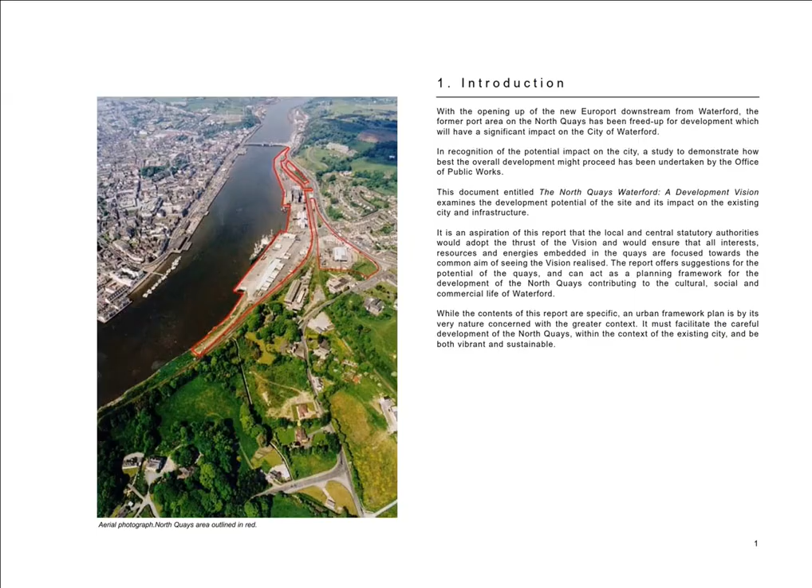Part 2, Executive Summary. The quays along the north side of the river Suir in Waterford will be underused and in time an eyesore, from the waterfront on the South Quay. However, it provides a unique opportunity for development, creating a dynamic transformation of the area, which will contribute to the re-emergence of Waterford as an important and active centre, both in an Irish and European context. This site directly faces the South Quays, and any development would therefore not only be clearly visible for its entire length, but it would also afford the best views of the historic city centre.

Development of the North Quays will have a dual role, of creating its own coherent image and identity, and also integrating with the rest of the city. Examination of the site indicates that there is scope to utilize imaginative measures to overcome the limitations, and to add to the attractiveness and quality of life proposed for that quarter. This site is, for many visitors to Waterford, the first interface with the city. It is also part of an immediate landscape of dramatic scale prompted by the cliff face and steep hill. Studies of the landscape, built and natural, the setting, scale of existing development, and the recent history and uses of the quays, confirm the potential for suitable mixed development.

The elements that comprise the character of the site make up an integrated landscape of different scale and quality to that evident on the South City. It is this quality, in conjunction with the strategic location of the site, both locally and regionally, that can provide the dynamic for this part of the city, to evolve economically and socially. The strategy proposed in this report takes the above strengths of the North Quays as its starting point, as well as addressing other parallel issues.

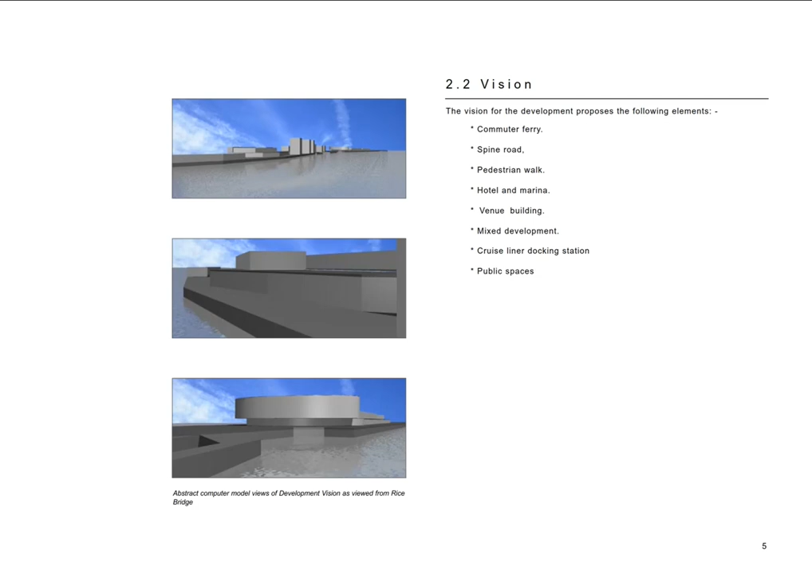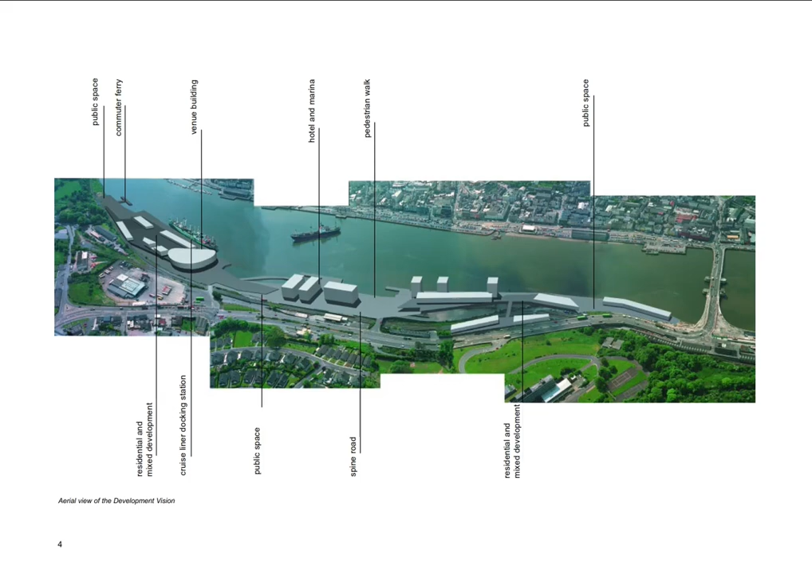2.2 Vision. The vision for the development proposes the following elements: Commuter ferry. Spine road. Pedestrian walk. Hotel and marina. Venue building. Mixed development. Cruise liner docking station. Public spaces. Part 3, the North Quays in context.

3.1 Physical analysis. 3.2 Transport infrastructure. 3.3 History. 3.4 Strengths and advantages.

3.1 Physical analysis. This report examines the section of the quays that stretches along the north edge of the river Suir, between Rice Bridge and Abbey Church.

Its southern boundary is the river, while to the north, it is contained by the railway line. Along the 1.5 miles of its length, the land varies between 40 and 80 meters in width. It is an assembly of a variety of independent man-made wharves. The ground is flat at just under 3 meters above sea level, at Ordnance Datum Malin Head.

The natural landscape behind the quays rises sharply to the east. The dock road and railway line run side by side between the quays and high ground, until the railway slips under the road as it meets the bridge.

The quays are mostly open empty space, in which lifting cranes, temporary storage sheds, large mill buildings and silos sit, as reminders of Waterford's industrial and maritime history.

The development of a Europort, 4 miles downstream, is gradually relocating the port activity.

With the exception of the railway station, Jury's Hotel, schools, a church and the low-rise residential community of Ferrybank, most of the city of Waterford is located on the south of the river.

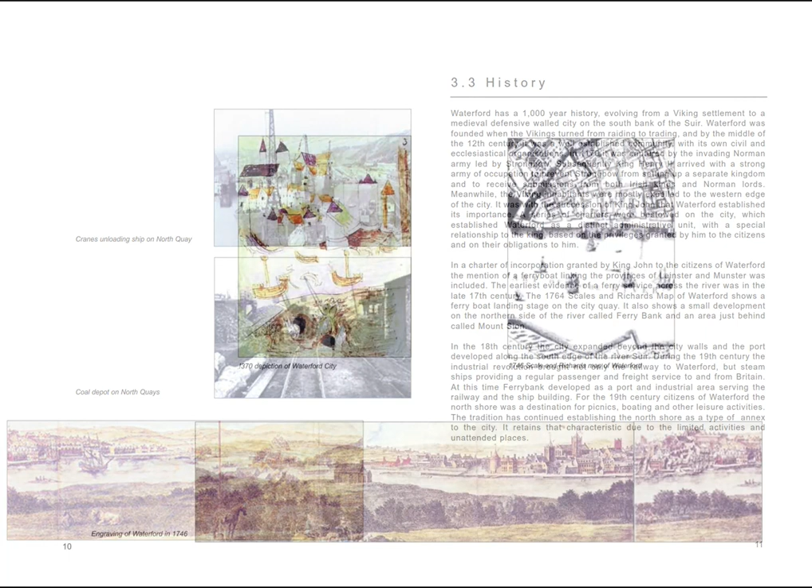It was with the succession of King John that Waterford established its importance. A series of charters were bestowed on the city, which established Waterford as a distinct administrative unit, with a special relationship to the king, based on the privileges granted by him to the citizens and on their obligations to him.

In a charter of incorporation granted by King John to the citizens of Waterford, the mention of a ferryboat linking the provinces of Leinster and Munster was included. The earliest evidence of a ferry service across the river was in the late 17th century. The 1764 Scales and Richards map of Waterford shows a ferryboat landing stage on the city quay.

It also shows a small development on the northern side of the river called Ferrybank, and an area just behind called Mount Sion. In the 18th century the city expanded beyond the city walls, and the port developed along the south edge of the river Suir.

During the 19th century the Industrial Revolution brought not only the railway to Waterford, but steamships providing a regular passenger and freight service to and from Britain. At this time Ferrybank developed as a port and industrial area serving the railway and shipbuilding.

For the citizens of Waterford in the 19th century, the North Shore was a destination for picnics, boating and other leisure activities. The tradition has continued, establishing the North Shore as a type of annex to the city, and it retains that characteristic mainly due to limited activities and untended areas there.

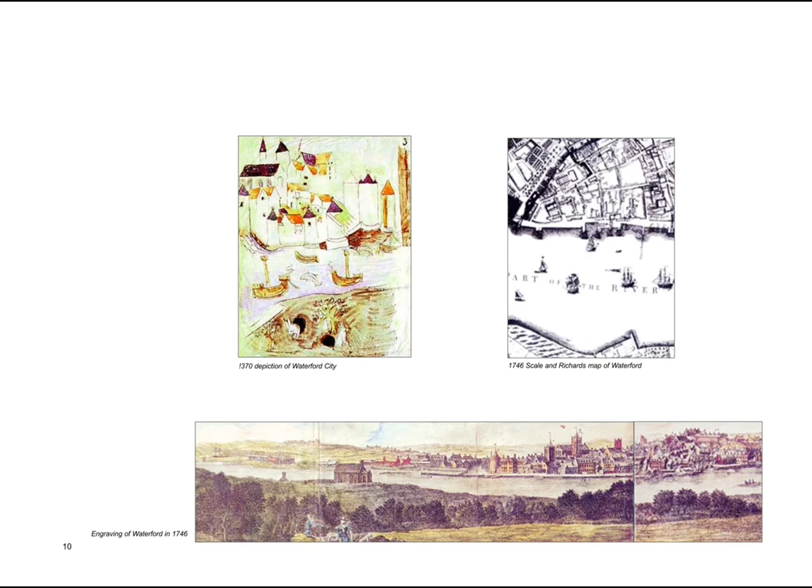Section 3.4 Strengths and advantages. One: it is a contained site with the river to the south, railway and hill behind. Two: south orientation. Three: unobstructed views downstream and across the river to the South Quay. Four: immediate access to the site from the road network.

Five: proximity of railway station. Six: existing buildings capable of adapting to new use. Seven: 155 acres, 62.7 hectares, of vacant site to receive new development. Eight: new transport link with the South Quays possible.

Nine: scale of the site is large enough to be compatible with that of passenger cruise liners docking in Waterford. Ten: the site offers a variety of potential functions as part of the development. Eleven: existing access points occur at strategic locations.

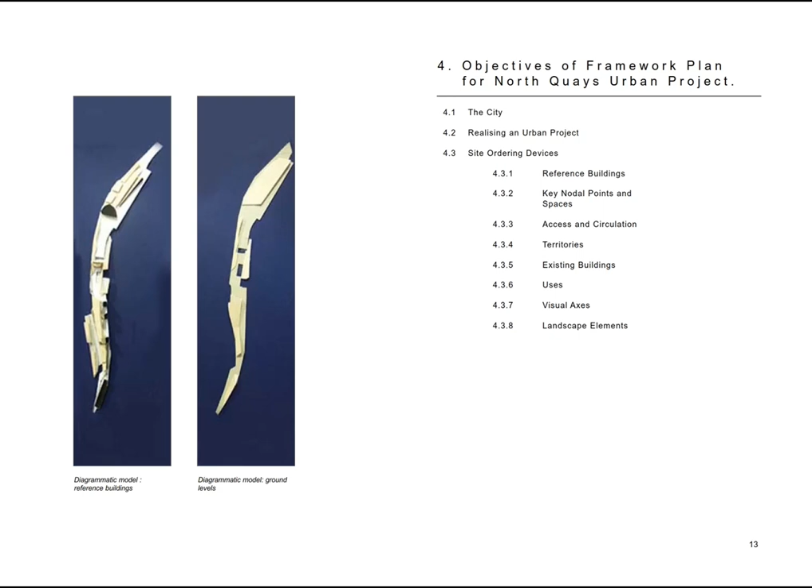Part 4: Objectives of Framework Plan for the North Quays Urban Project. 4.1 The city itself. 4.2 Realizing an urban project. 4.3 Site ordering devices, including: 4.3.1 reference buildings, 4.3.2 key nodal points and spaces, 4.3.3 access and circulation, 4.3.4 territories, 4.3.5 existing buildings, 4.3.6 uses, 4.3.7 visual axes, and 4.3.8 landscape elements.

4.1 The city. Redeveloping the North Quays will make a substantial impact on Waterford City, economically, physically and socially. The immediate proximity of the quays to the centre of the city, its long river frontage and accessibility to road networks, determine the strength of its location.

The disadvantage of poor access between the site and the city centre across the river will have to be addressed in any eventual development. Rotterdam and Bilbao, although on much larger scales, have addressed similar sites in their cities in the last 10 years, on ground that is geographically and administratively located in the centre of the city, but yet economically and physically isolated. In Rotterdam, through the use of a new bridge, the Kop van Zuid, a once removed part of the city is now attached to its centre, and has extended the centre along a new strategic axis.

The general approval that the Kop van Zuid has enjoyed from the beginning has been due mainly to the fact that this project represented the City Council's aspiration to give the city a new international allure, and the desire to guarantee that any new urban development scheme should also benefit the existing city and its inhabitants. A social return is ensured through the exercising of proper control on the material impact of new urban design projects on the existing city.

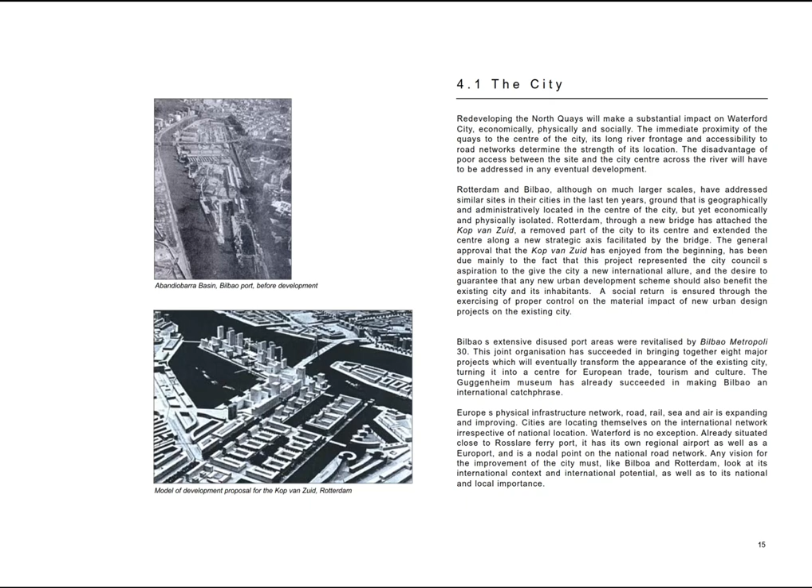Bilbao's extensive disused port areas were revitalized by Bilbao Metropoli 30. This joint organization has succeeded in bringing together 8 major projects, which will eventually transform the appearance of the existing city, turning it into a center for European trade, tourism and culture. The Guggenheim Museum has already succeeded in making Bilbao an international catchphrase.

Europe's physical infrastructure network, road, rail, sea and air, is expanding and improving. Cities are locating themselves on the international network irrespective of national location. Waterford is no exception. Already situated close to Rosslare Ferry Port, it has its own regional airport as well as a Europort, and is a nodal point on the national road network. Any vision for the improvement of the city must, like Bilbao and Rotterdam, look at its international context and international potential, as well as to its national and local importance.

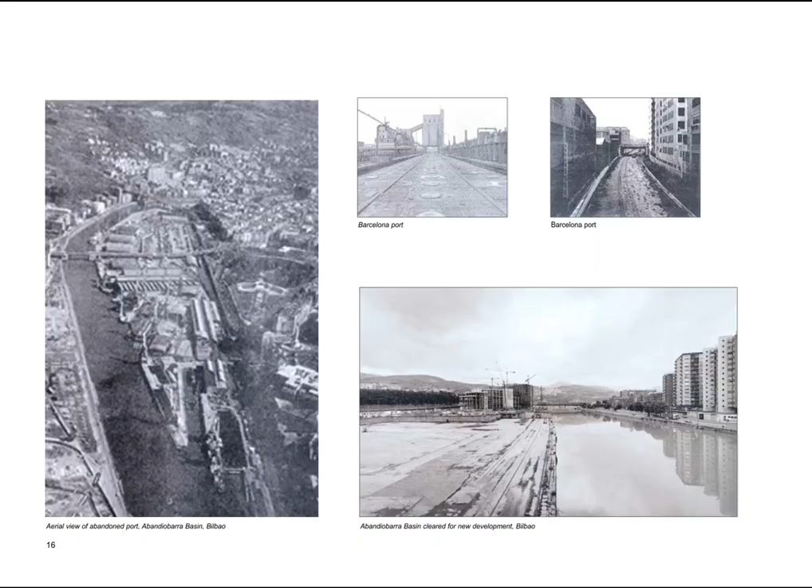4.2 Realizing an urban project. Urban projects, like the vision for the North Quays, currently hold center stage position in discussions on the state of the emerging city of Waterford. Projects concerning vast tracts of ground have become the focus of attention in other cities, where infrastructure expansion and advancement has made almost obsolete the existing city's structural framework.

These urban projects, primarily through their proximity to transport networks, hold the capacity to become new centralities, different to the traditional city centre. In January 1998, the Europan Federation held a forum to compose the charters for its fifth competition. Europan is the European Federation for Architectural Competitions. It aims to generate more in-depth knowledge of, and reflection on, housing issues and urban planning, and to promote exchange on this subject among the different countries of Europe.

For large urban projects, Europan is of the view that no plans are formally approved, rather there are ideas, which, if they have sufficient force, enable the smaller project to be realized within the general ideas. This ensures private investment is guided towards a compatibility with public investment, in that the ideas proposed by the design team reflect what is beneficial to the city and its inhabitants, and are also economically attractive for private investors.

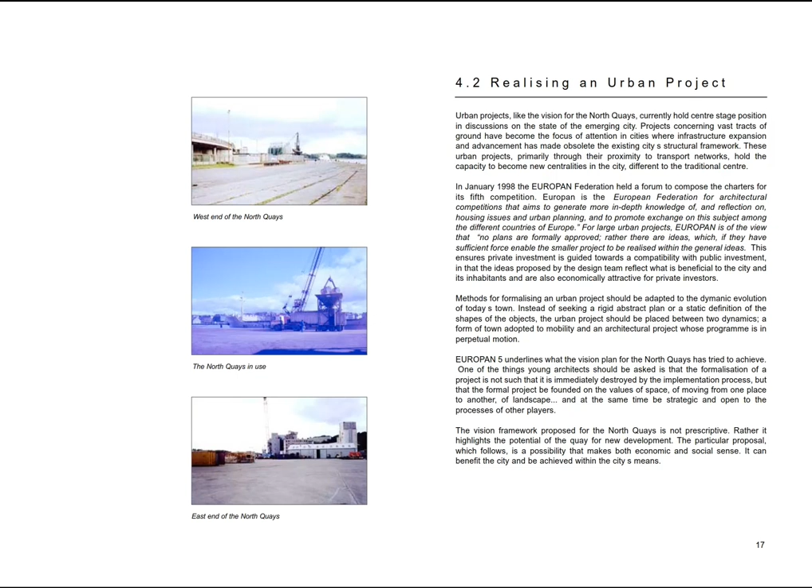The vision framework proposed for the North Quays is not prescriptive. Rather it highlights the potential of the quay for new development. The particular proposal, which follows, is a possibility that makes both economic and social sense. It can benefit the city, and be achieved within the city's means.

4.3 Site Ordering Devices. Appropriate architectural ordering devices must be established for any proposed development form. These site ordering devices will emerge from both the existing atmosphere of the site and the physical form of the ground. They must be considered, and in some cases must dictate the design process.

The North Quays site is a long and narrow strip of ground taking the shape of a slender, elongated S. There is no singular connecting line of vision through the site, rather a number of smaller axes prevail, as a result of the site form. This internal dynamic creates a collection of zones or territories of various spatial proportions and orientations. In moving from one end of the site to the other, one experiences the various qualities of each of the territories. The properties of each differing zone will feature in the design of the overall site layout mainly due to the extensive size and unique shape of the site.

A controlled layout cannot be exercised in one volume. Waterford City, in 1998, is not unlike other cities elsewhere in Europe with its declining port activity. Bilbao, as previously mentioned, bears particular resemblance in areas of its abandoned port along the River Nervion, which has recently been regenerated in the face of declining port activity.

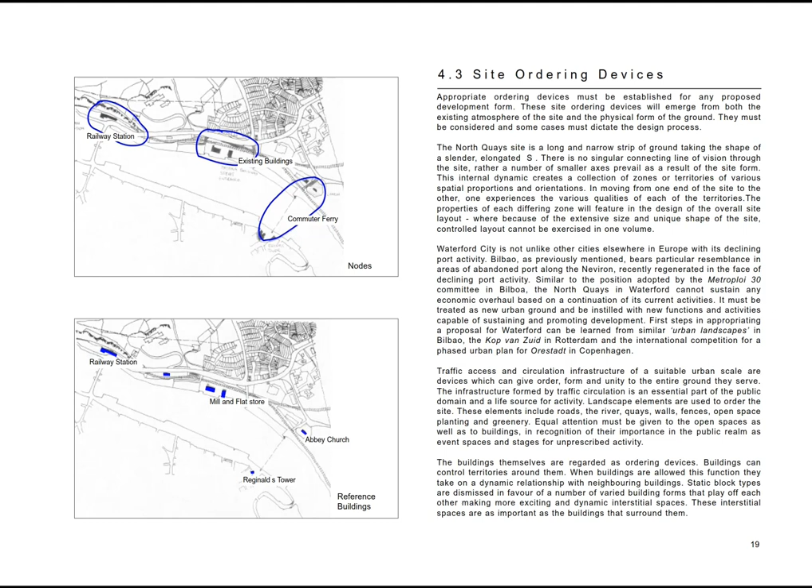Similar to the position adopted by the Metropoli 30 Committee in Bilbao, the North Quays in Waterford cannot sustain any economic overhaul based on just continuation of its current activities. It must be treated as new urban ground and instilled with new functions and activities capable of sustaining and promoting development. First steps in appropriating a proposal for Waterford can be learned from similar urban landscapes in Bilbao, the Kop van Zuid in Rotterdam, and the international competition for a phased urban plan for Ørestad in Copenhagen.

Traffic access and circulation infrastructure of a suitable urban scale are devices which can give order, form and unity to the entire ground they serve. The infrastructure formed by traffic circulation is an essential part of the public domain and a life source for activity.

Landscape elements can be used successfully to order the site. These elements include roads, the river, quays, walls, fences, public open space, planting and greenery. Equal attention must be given to the open spaces as well as to buildings, in recognition of their importance in the public realm as event spaces and stages for unprescribed activity.

The buildings themselves are obviously regarded as ordering devices. Buildings can control territories around them. When buildings are allowed this function, they take on a dynamic relationship with neighboring buildings. Static block types are dismissed in favor of a number of varied building forms that play off each other, making more exciting and dynamic interstitial spaces. These interstitial spaces are as important as the buildings that surround them.

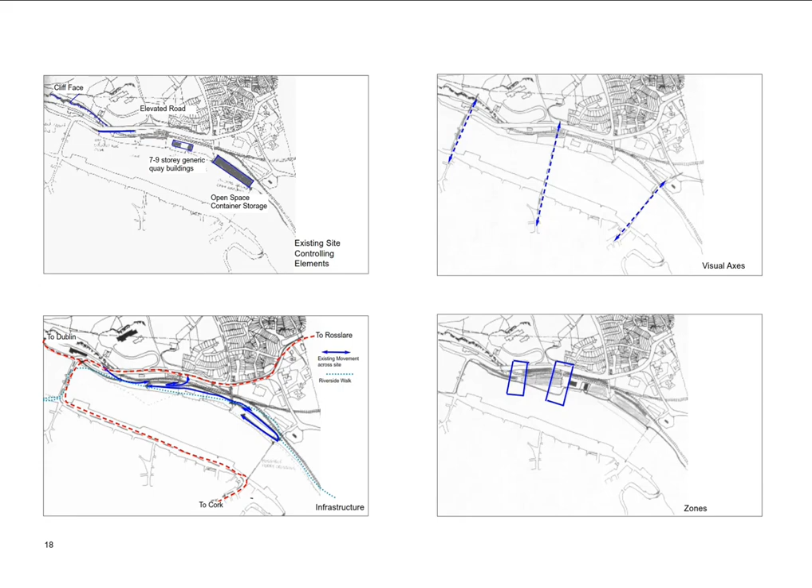4.3.1 Reference buildings. In many urban landscapes, buildings function beyond their immediate use, and serve to act as points of reference, benchmarks and navigational instruments for an area. From without, the North Quays need to be comprehended and referred onto benchmark buildings and spaces. Buildings can achieve this reference status by means of their size, form and grouping.

The long, strip-like plan of the North Quays demands a scattering of such markers along its length. Gaps and open spaces are also necessary as zones of relaxed concentration. Such buildings can offer yet a third function, that of civic use.

Towers proposed for the Abandoibarra area of Bilbao were accepted by the city, only when their top floors became public viewing platforms. To associate such dominant forms only with corporate identity was deemed inappropriate for the city.

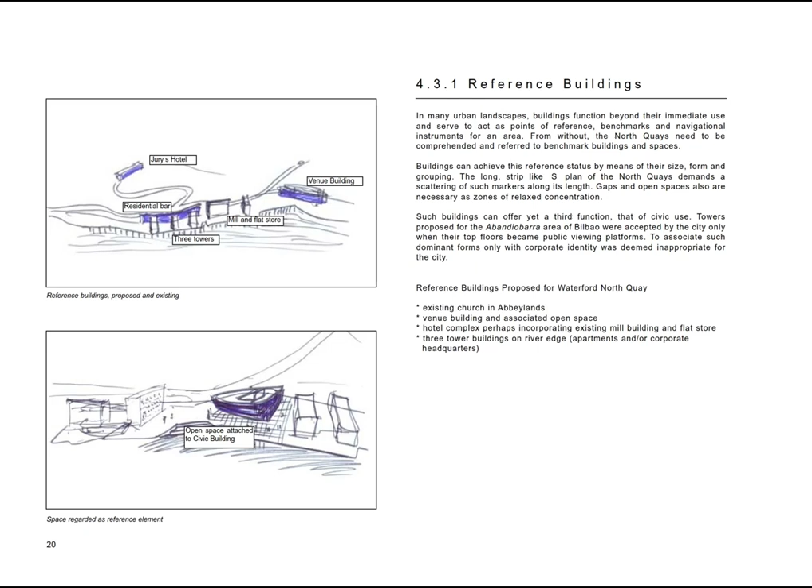Reference buildings proposed for Waterford North Quay: 1. Existing church in Abbeylands. 2. Venue building and associated open space. 3. Hotel complex, perhaps incorporating existing mill building, and flat store. 4. Three tower buildings on river edge, apartments and or corporate headquarters.

4.3.2 Key nodal points and spaces. It is vital for any development project of limited economic activity to be firmly embedded into its urban context. This involves recognizing areas where existing activity can determine the evolution of a part of the new development.

The project group for the Kop van Zuid in Rotterdam named four intersection or concentration points as places to embed the project terrain into the neighborhood where it is situated. Not only does this action benefit the new development, but it can also reinforce and advance social and economic activity in the existing area. Competitors making proposals for the Ørestad region of Copenhagen all proposed zones of concentration, dispersed through the region, that in time would grow into each other.

The railway station, and the ferrybank residential community surrounding St. Mary's Church, lie at opposite ends of the North Quays. Both of these areas can be reinforced, through the allocation of new compatible activities, to these zones of the quay.

Other zones of concentration can be made with new activity. For instance, an anchor project, or an open space, or existing buildings have the physical and functional status to attract other activity. Zones of concentration can coincide with reference buildings and spaces.

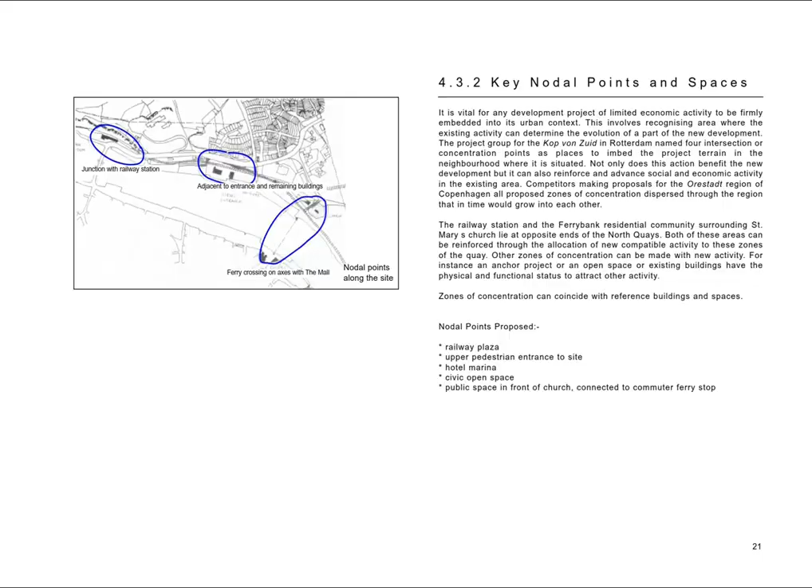4.3.3 Access and circulation. As it stands, there are 2 entrances to the North Quays site, across the railway line at the CIE depot and over the railway bridge on the slip road behind the silos. In making the proposal for the North Quays, other locations were considered as a primary entrance, but were subsequently put aside in favor of the more practical solution.

These entrance points feed traffic onto a spine road, which runs parallel to the railway line. This road is not a through road, and only serves the quays. Both ends terminate under new raised platforms, where service accesses and parking are located. Attached to this road are secondary roads which connect into the depth of the site.

A commuter ferry links the North and South Quays at their east ends. This will connect the North Quays with the commercial centre of Waterford City and will reinstate an old ferry crossing that brought people from Reginald's Tower to Abbey Church for recreational pursuits in the past.

A pedestrian route runs through the site, and along its length this route is enhanced by pedestrian access to the site and by a series of semi-private and public spaces. Unlike the traffic spine, this movement along the site is not strictly controlled and a variety of circulation ways to destinations are available.

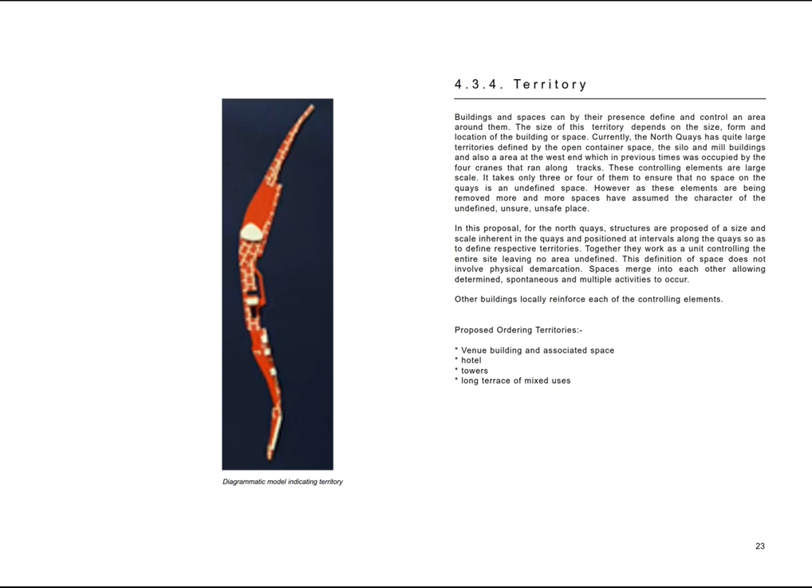4.3.5 Existing buildings. Although many abandoned elements of the North Quays are being removed, it is important not to assume that future development needs cleared, empty ground. Rather than create a new urban area with a new internal scale, or mimic the scale and arrangement of the South Quays, new development can stem from the scale and arrangement already inherent on the site.

This scale is large in comparison to the prevailing domestic scale of the South Quay facades, but is in harmony with its contextual landscape. The dominating landscape never allows the quay itself to be viewed in isolation. Instead, it is seen as part of a greater picture composed of a high steep hill, a large slab hotel building, wide primary roads, a cliff face and long railway station building.

Any future development will be read against this same landscape and must therefore be of an appropriate scale, in order to become part of the composition. Existing buildings, when appropriate for reuse, are an organic cell that can stimulate new development proposals.

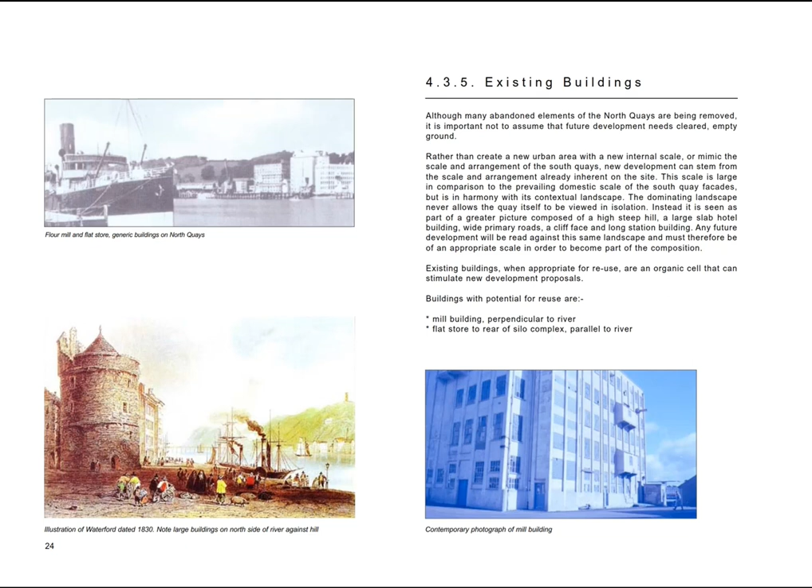Buildings with potential for reuse are: 1. Mill building, perpendicular to river. 2. Flat store to rear of silo complex, parallel to river.

4.3.6 Uses. Currently, a mixture of uses combined with less density of consolidated urban fabric, green areas, and an overall diversity, are the concepts internationally pursued for contemporary urban areas. Public buildings and activities are sited among commercial and residential areas, in order to achieve a level of activity sufficient to sustain areas of common multipurpose use.

New, semi-independent centers need much economic activity to sustain them, as is evident in the Port 2000 Center in Barcelona. In an area that is not being rebuilt for an existing use, and an area with no existing community, it is vital that the mixed-use arrangement extends to the individual building.

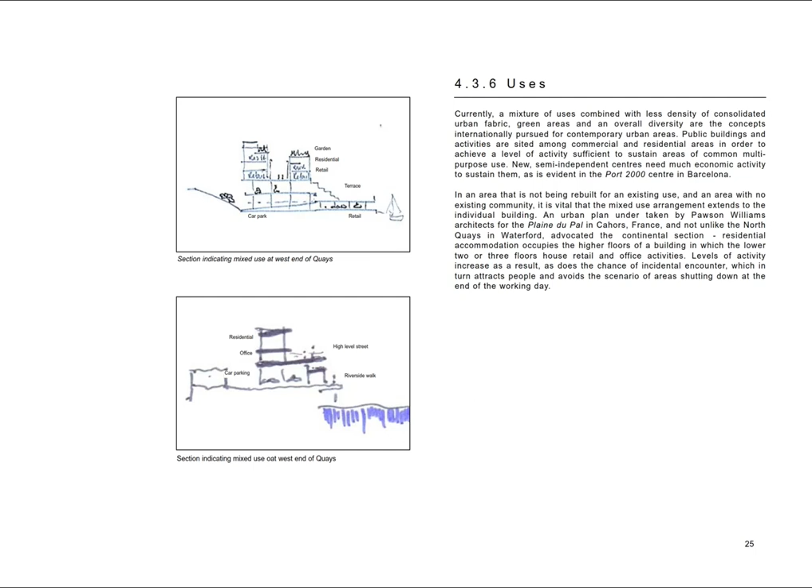An urban plan undertaken by Pawson Williams Architects, for the Plaine du Pal in Cahors, France, and not unlike the North Quays in Waterford, advocated the continental section. Residential accommodation occupies the higher floors of a building in which the lower 2 or 3 floors house retail and office activities. Levels of activity increase as a result, as does the chance of incidental encounter, which in turn attracts people and avoids the scenario of areas shutting down at the end of the working day.

4.3.7 Visual Axes. Visually, the North Quays is an exposed site area. Views penetrate its depth from every direction, making it virtually transparent. Unlike the South Quays, it isn't composed of a strip facade with buildings behind. It consists of a number of free-standing buildings, surrounded by their associated grounds, and it is in wide views and vistas, principally from the south, that it is assembled as a whole.

From any position on the South Quays a view of the entire North Quay is offered. Framed views are afforded along the streets running perpendicular to the quays. Thus the North Quays is the backdrop for the South City.

Approaching the city along the national roads from the north or east, views over and through the North Quays to the south give the first glimpses of Waterford. These roads continue to fall down to river level as they swing to run parallel along the edge of the quays until they converge at Rice Bridge. Always above the level of the quays, they offer views that overlook the city.

Passenger cruise liners dock in Waterford during the summer season. They travel up the river Suir approaching Waterford, and the North Quays are their first view, with the landscape rising steeply behind it. Rather than docking on the south bank as previously, the cruise liners will dock on the North Quays against a landscape of a similar scale, which in the past was the shipbuilding area as well as the docking location for many ships arriving in Waterford.

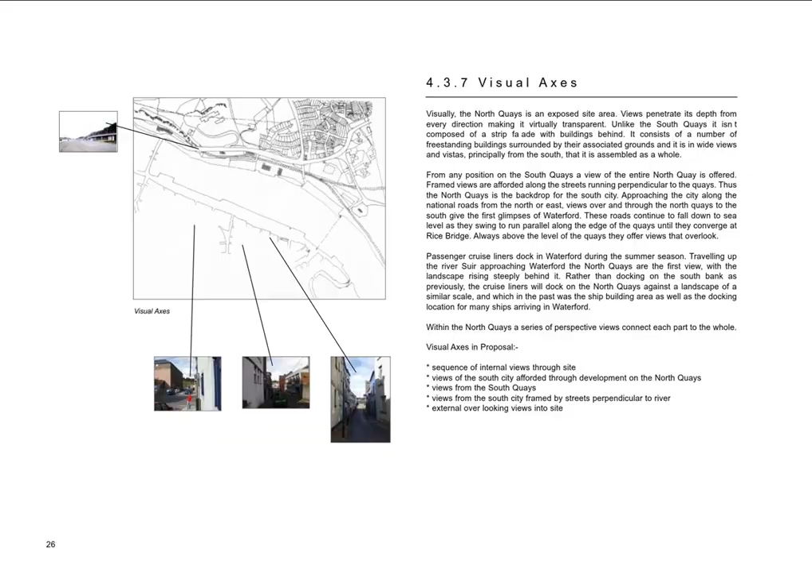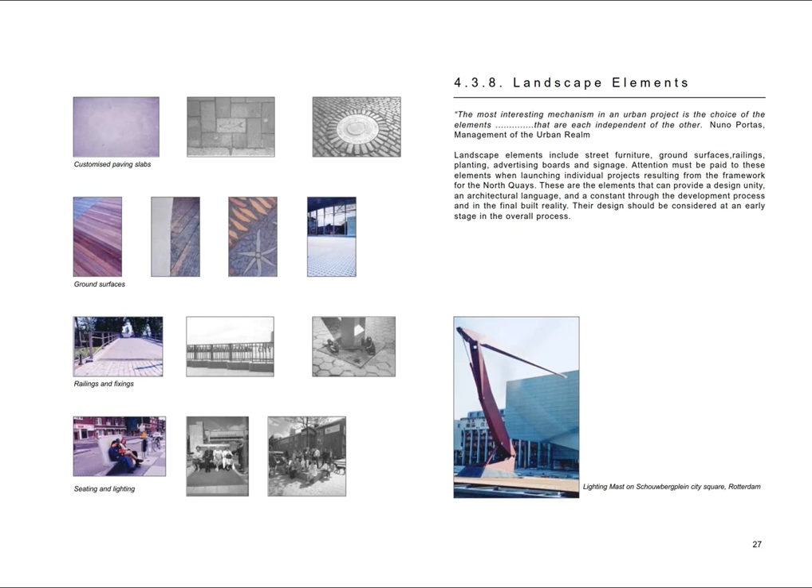4.3.8 Landscape elements. Quote: 'The most interesting mechanism in an urban project is the choice of the elements that are each independent of the other.' Nuno Portas, Management of the Urban Realm. Landscape elements include street furniture, ground surfaces, railings, planting, advertising boards and signage. Attention must be paid to these elements when launching individual projects resulting from the framework for the North Quays. These are the elements that can provide a design unity, an architectural language, and a constant through the development process, and in the final built reality. Their design should be considered at an early stage in the overall process.

Part 5. Proposed projects and opportunities. These are: Commuter Ferry, Spine Road, Pedestrian Walk, Hotel and Marina, Venue Building, Mixed Development, Cruise Liner Docking Station, and Public Spaces.

5.1 Commuter Ferry. The development of Waterford City was confined to the south of the river Suir until the construction of Timbertoes Bridge in 1793. However, there were ferries that connected Munster to Leinster as early as the 12th century. The earliest map to show the ferry connection is the 1764 Scale and Richards map, in which the ferryboat slip is shown opposite the end of Conduit Lane, and the original ferrybank was directly across the river.

During the 19th century, when Waterford was a major shipbuilding centre, many people crossed the river by ferry to attend the launching ceremonies in Ferrybank. At the turn of the century, many Waterford families enjoyed excursions northwards across the river, to the pleasant wooded surroundings at the Waterford Boat Club. The last remaining ferry across the river was electrified in 1942, but was discontinued in 1949 when the old ferryboat was deemed to be unseaworthy.

The introduction of a new passenger ferry across the river is an essential element of the vision for the North Quays. For the development to be viable and sustainable, it is important that it is firmly linked to the heart of the city on the south bank.

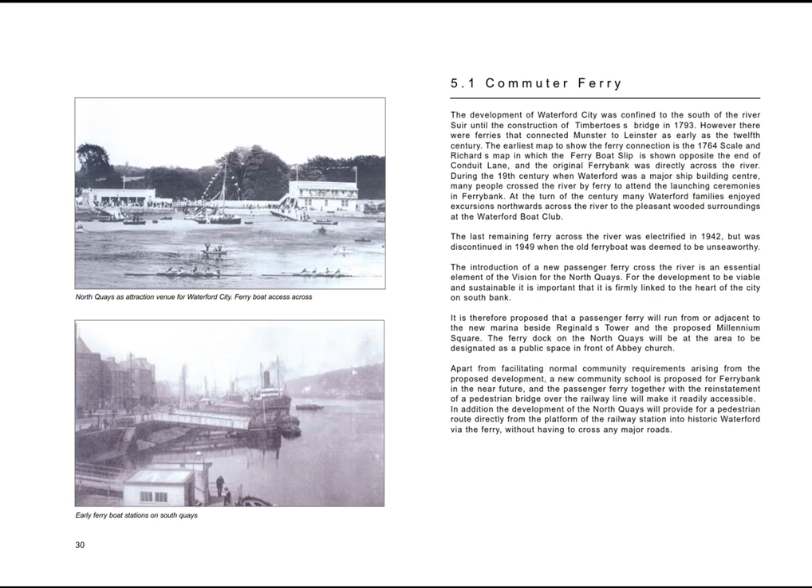It is therefore proposed that a passenger ferry will run from or adjacent to the new marina beside Reginald's Tower and the proposed Millennium Square. The ferry dock on the North Quays will be in the area designated as public space in front of Abbey Church. Apart from facilitating normal community requirements arising from the proposed North Quays development, a new community school is proposed for Ferrybank in the near future, and the passenger ferry, together with the reinstatement of a pedestrian bridge over the railway line, will make it readily accessible. In addition, the development of the North Quays will provide a pedestrian route directly from the platform of the railway station into historic Waterford via the ferry, without having to cross any major roads.

5.2, Spine Road. Vehicular access to the North Quays development is essential for it to be viable. There is, however, no existing vehicular traffic route through the site. Access will be maintained via the existing bridge over the railway line and the level crossing at the existing Rockshire Road traffic lights. These will feed the Spine Road that runs almost the length of the back of the site, servicing all the major commercial buildings and residential developments. The Spine Road will follow a route through the back, north, of the site, going through and under the developments, linking buildings by spurs at right angles to the river.

5.3, Pedestrian Walk. Pedestrian access through the North Quays development is an important element of the vision. The pedestrian walk is not simply a functional path at the river edge, but takes the visitor through various spaces and experiences. The North Quays development will have direct pedestrian access from the main platform of the railway station, under the road bridge, to give the first full-length vista of the South Quays. This vista will give a much improved first impression of Waterford, distinct from the existing view across a busy traffic junction. The visitor then has a choice to either take a riverside walk, or to take the more direct route beside a terrace of small-scale commercial and retail outlets.

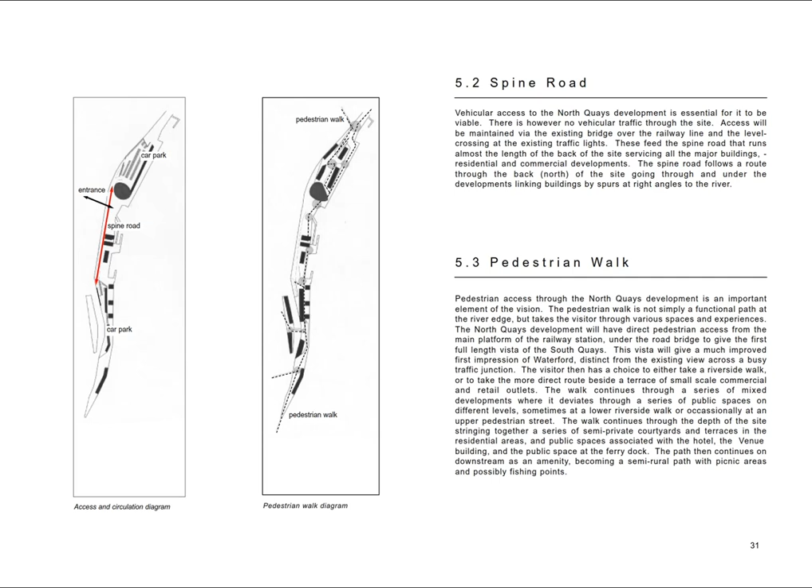The walk continues through a series of mixed developments where it deviates through a series of public spaces on different levels, sometimes at a lower riverside walk or occasionally at an upper pedestrian street. The walk continues through the depth of the site, stringing together a series of semi-private courtyards and terraces in the residential areas, and public spaces associated with the hotel, the venue building, and the public space at the ferry dock. The path then continues downstream as an amenity, becoming a semi-rural path with picnic areas and possibly fishing points.

5.4, Hotel and Marina. The vision for the North Quays suggests that two existing buildings may be retained and converted: the existing flour mill and an adjacent flat store. The structure of the flat store is ideally suited for conversion to a multi-story car park for the hotel. The flour mill, together with a new structure of similar dimensions, could form the hotel. The inclusion of these two existing structures in the vision is designed to give an indication of scale, orientation and character to the envisaged built development, as well as the spaces created between the structures. The proposed hotel will have between 60 and 100 beds, as well as a high standard of public facilities with unique aspects and views of the city.

It is also proposed that the hotel would have its own marina. The main access to the hotel and marina is from a landscaped public space in front of the venue building. It is envisaged that this public space will itself become a venue for fringe events related to the main activity in the venue building, whether it be conferences, exhibitions or concerts. As well as acting as a forecourt to the hotel, it also puts the venue building into a public space, and affords a generous disembarking plaza in scale with docking cruise liners.

5.5, Venue Building. The venue building is envisaged as a major civic building that will provide a location for a very wide range of activities that will draw large numbers of people to Waterford. It will in future grow to represent the city for many of its visitors, as well as becoming the symbol or icon for contemporary Waterford. While a specific brief for this project will require detailed research, it is suggested that this proposed venue building will provide conference facilities for up to 800 people, with backup facilities for catering, exhibitions and so on. The public space between the venue building and the hotel provides an appropriate foreground between the building and the river for fringe and overflow activities.

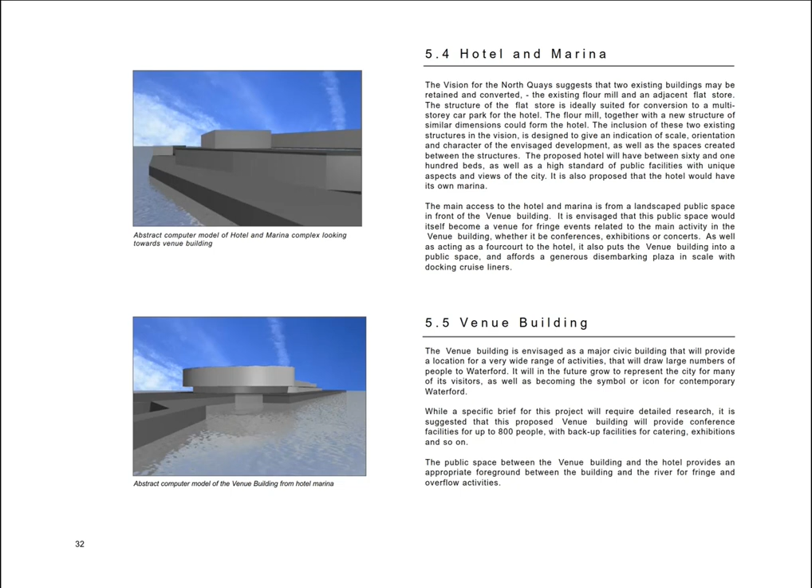Mixed development: residential buildings. Residential development is mixed with commercial, retail and office developments throughout the site. There are three 10-story high towers located on the waterfront to the west of the hotel, at least two of which would be used completely for apartments, the third could be used all or in part as a corporate headquarters.

It is recommended that there is a mix of apartment sizes throughout the development. It is also recommended that there should be a mix of privately owned dwellings, as well as local authority social housing, and that rental accommodation should be included in the development.

Retail buildings. Retail premises will be available throughout the North Quays development. These will range from smaller-scale newsagents, grocers, cafes, print shops in the area adjacent to the railway station, to more upmarket boutiques, souvenir shops, bistros and restaurants in the area between the venue building and the new public space in front of Abbey Church. It is proposed that there will be accommodation for larger retail outlets at quay level, in the mixed development to the west of the hotel.

Office buildings. A substantial floor area of office space is envisaged for this development, mixed with retail and residential accommodation, and distributed throughout the site. It is proposed that office premises suitable for telesales be located near the west end of the site.

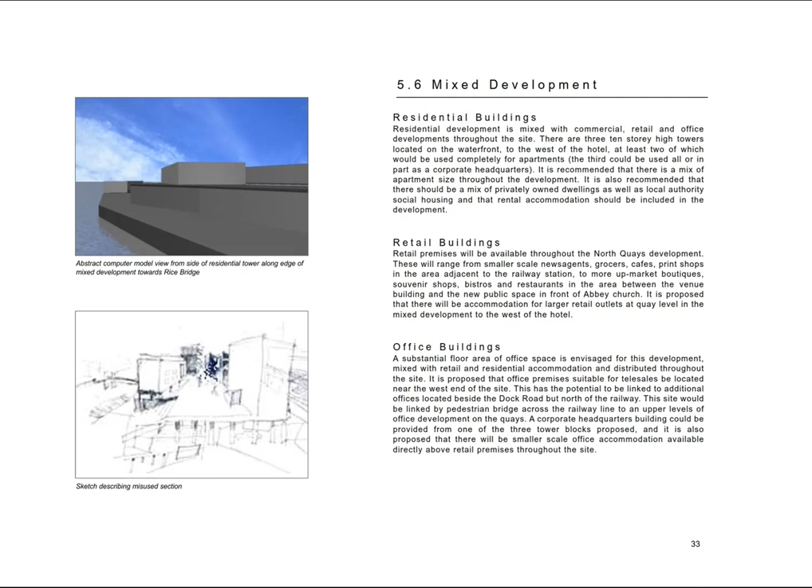Cruise liner docking station. The vision provides for a docking station for cruise liners beside the venue building. The provision of a docking station will, it is hoped, increase both the numbers of cruise liners visiting Waterford, and increase the time that visitors spend in Waterford.

The location of the proposed cruise liner docking station has been selected to provide the most appropriate setting in scale with large cruise liners. The range of facilities to be provided at the North Quays could in time be of added value to cruise companies because of their immediate adjacent availability to docking liners. The combined value of the docking liners and the venue building could be of value to local and national interests, and indeed international interests too.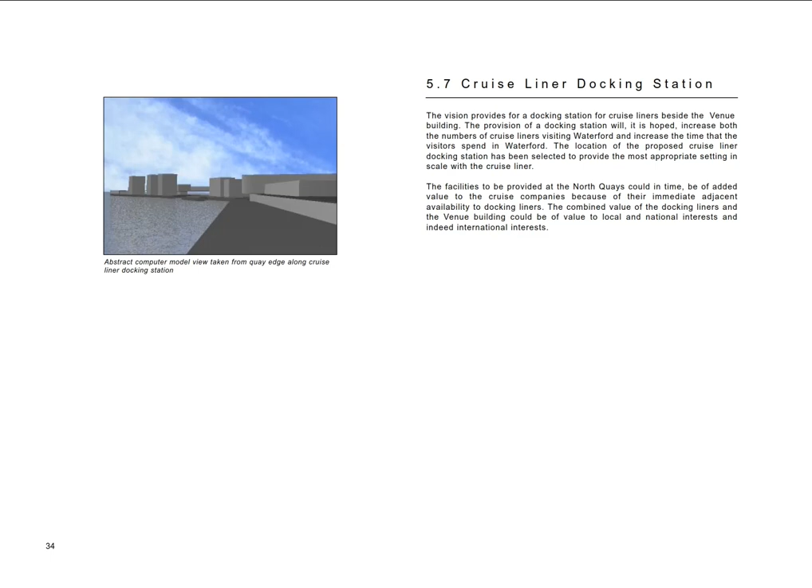Public spaces. There are a series of public spaces proposed throughout the development. The largest public space acts as a forecourt for both the venue building and the hotel and marina. It is envisaged that this public space would itself become a venue for fringe events related to the main activity in the venue building, whether it be conferences, exhibitions or concerts, or as a forecourt for the hotel. It will also afford a generous disembarking plaza for passengers from cruise liners, in scale with a docked liner.

The second major public space is the area in front of Abbey Church. This will have more of the character of a small town square, or neighborhood. It forms the focus of the primary pedestrian access from the existing community in Ferrybank, as well as the gathering point for those using the proposed commuter ferry.

The third public space is at high level in the mixed development to the west of the proposed hotel. Here access is afforded to the quays from Dock Road by crossing a second proposed pedestrian bridge across the railway line. This public space will give high-level views across the river.

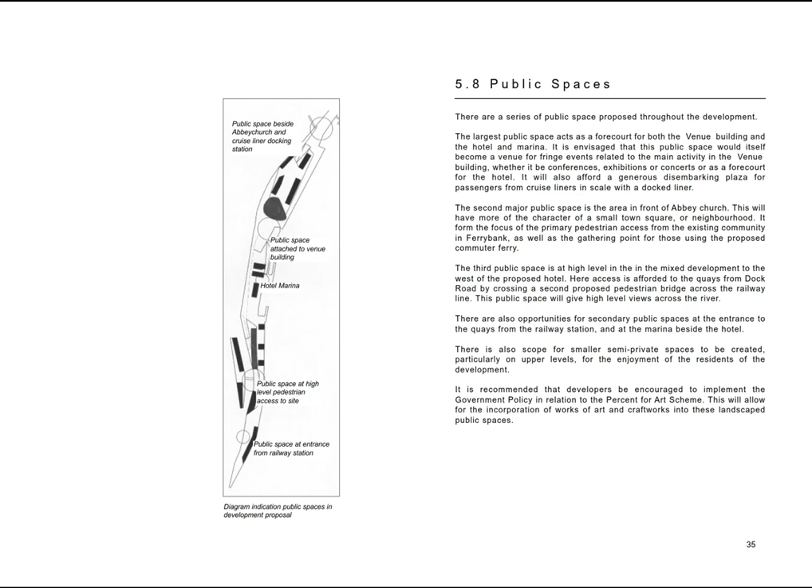There are also opportunities for secondary public spaces at the entrance to the quays from the railway station, and at the marina beside the hotel. There is also scope for smaller semi-private spaces to be created, particularly on upper levels, for the enjoyment of the residents of the development. It is recommended that developers be encouraged to implement the government policy in relation to the Percent for Art scheme. This will allow for the incorporation of works of art and craftworks into these landscaped public spaces.

Waterford North Quays Steering Group. Martin Cullen TD. Eddie Breen. John Clancy. Klaus Unger. Angela Rolfe. Michael Guilfoyle. John McCarthy. End of report.